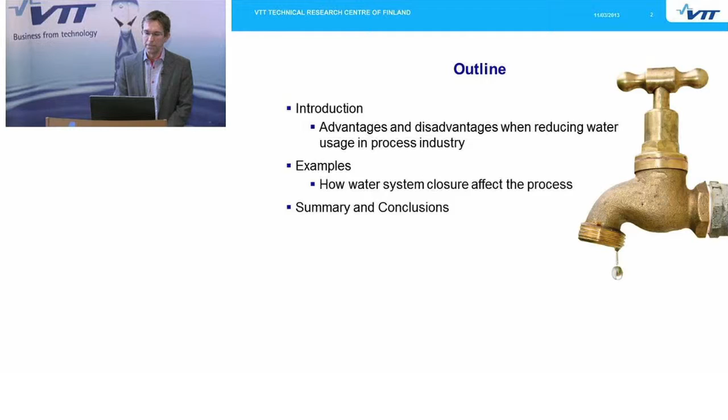Thank you, Tuomas. Ladies and gentlemen, I will take a slightly more practical viewpoint to today's topic, and I will start by briefly describing the challenges and benefits that could come out when you are using water footprint, for instance, in reducing water consumption in industry. And then I will show some examples from VTT studies how these issues can be managed and what kind of consequences there might be. And in the end, I will repeat myself and tell this all over again in the summary.

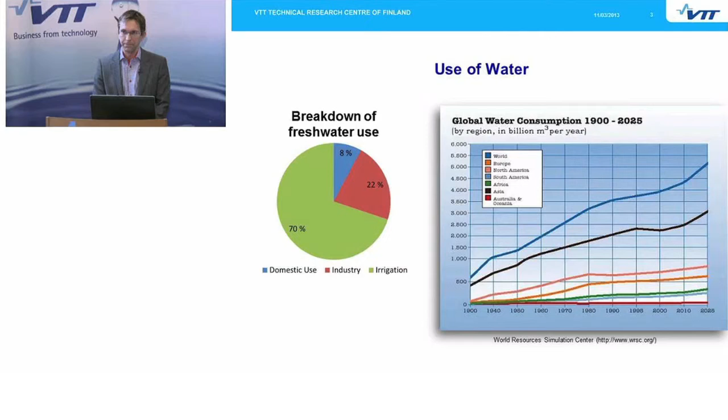Minister Niinistö already covered the statistics quite nicely. As he said, the industrial usage of fresh water is slightly more than 20% of the total fresh water consumption in the world. But of course, if you add up all the reused water as well, this share increases significantly. And the challenge here is, of course, that the water consumption is expected to increase.

And where is the water then used? Helena later today will come back to this issue. I will just shortly list the main usages of water in process industry. Material is easier to transport in liquid form, and therefore water is used basically to dilute the material for transportation, for pumping. And of course, for shower waters, shower in process industry means probably a bit different thing than in households, but it's like wetting, trimming, for instance, in paper making, trimming the web, cleaning and anti-foam purposes.

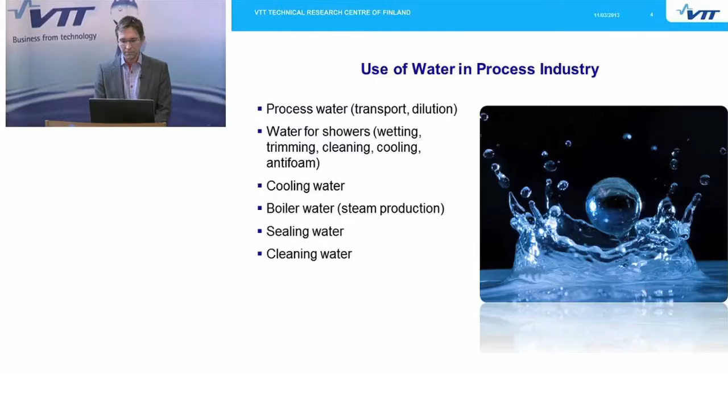Then cooling water, there are cooling systems in almost every industrial process. And the other side of the story is the steam production, heating and drying. Water is used there as well. And then sealing water for pumps and of course for cleaning.

Good thing in reducing water usage is that there are several advantages as well. Without these benefits, there would be no sense to do that. I have here divided these benefits into three categories. First one is economical advantages. This basically means that you are using less water. Water has some price, and therefore it's economically attractive to reduce water consumption. This is also related to the treatment of the fresh water. It costs as well.

Then from the process point of view, in principle, water recycling enables more stable operating conditions. This is mainly related to temperature, which I will come back to later. Then, of course, when you recycle water, you are also able to recover all the materials that have gone with the water. So therefore, from process point of view, you also can achieve lower material losses. And in some processes, drainage improvement as well, meaning productivity, which is again related to temperature mainly.

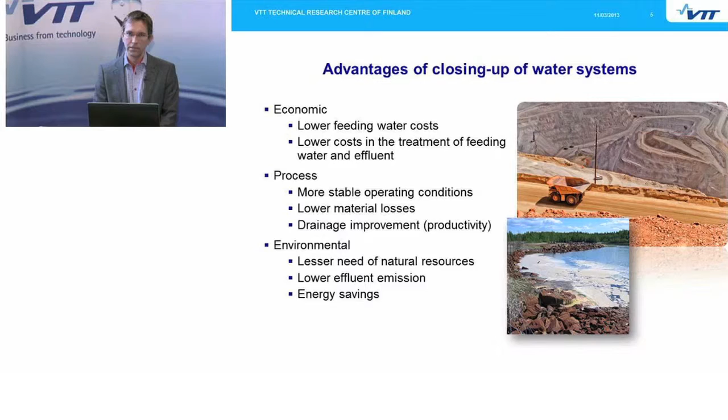And from environmental point of view, you need less natural resources, meaning water, and at the same time, you will have less effluents back to the environment. And of course, the energy savings, you don't have to heat up water and pump it so much.

On the other side of the story are the challenges. There are not only benefits. As I said, materials tend to accumulate in the water cycles once you start closing them. There are suspended solids, and there are also dissolved and colloidal substances. These affect the productivity, and moreover they affect the performance of different functions in the process, meaning, for instance, chemicals function differently when these so-called detrimental substances are accumulating.

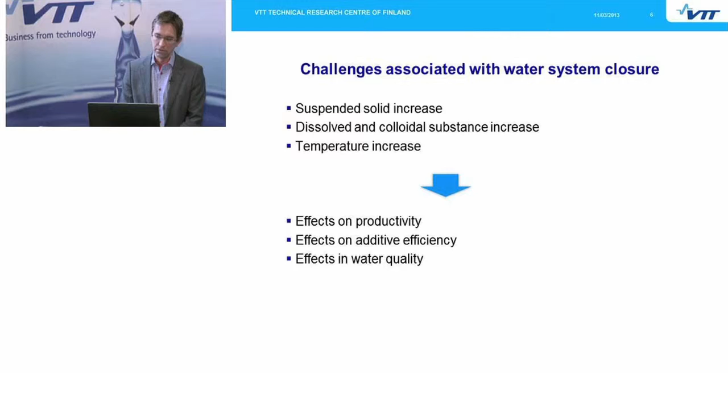And temperature increase is a challenge as well, since, for instance, microbiology may become an issue when the temperature settles at a convenient point for microbes to multiply. Then to the examples. I will look at these examples from physical, chemical, and microbial point of view, and show that this whole area is really complex. And I will start with the physical one.

So if you have a water system which is not closed at all, of course your freshwater quality varies, and you will have certain problems coming from the fresh water. But if the system is not closed, the problem comes and it goes away with the water. But when you start closing it, the same problem comes over and over again. And then we are talking about a certain type of oscillation. In principle, it fades away when new water comes in, and it kind of dilutes the problem.

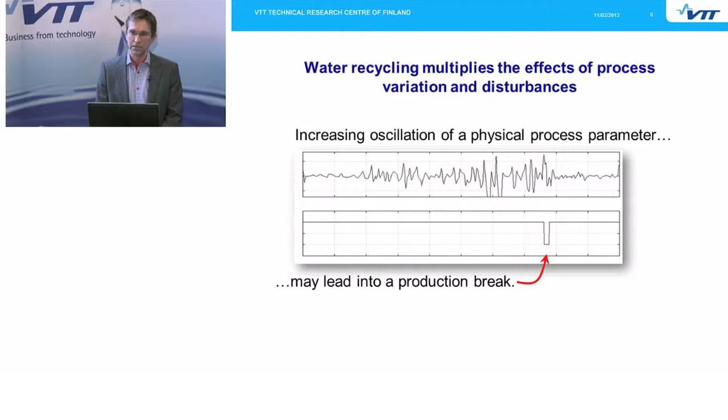But since the system must be controlled, there are certain control loops which try to compensate this problem by chemistry, by physics, by various types of activities. These oscillations tend to increase, and this is a typical physical increasing oscillation curve shown in the figure. And at some point, the process cannot handle it anymore, and it leads to a problem, in this case, a production break.

Next example is the chemistry part of the issue. This is an example from a paper making process, and there, in the beginning of this monitoring period, the system was closed, not totally, but the closure was increased, and it led to the accumulation of dissolved calcium into the process, as shown in the figure in the middle. This, of course, increased the conductivity.

The salt content of the process increased, which then started to affect the chemical balance of the system itself, which is shown in the lowest graph here. The charge started to decrease. This means that the anionic compounds and these salts started to accumulate in the process, and this is called anionic trash in the process. Then the chemicals added do not work the way they were designed to.

This anionic load increases the use of chemicals, and you really have to redesign the system from scratch, basically. This just emphasizes the complexity of the issue.

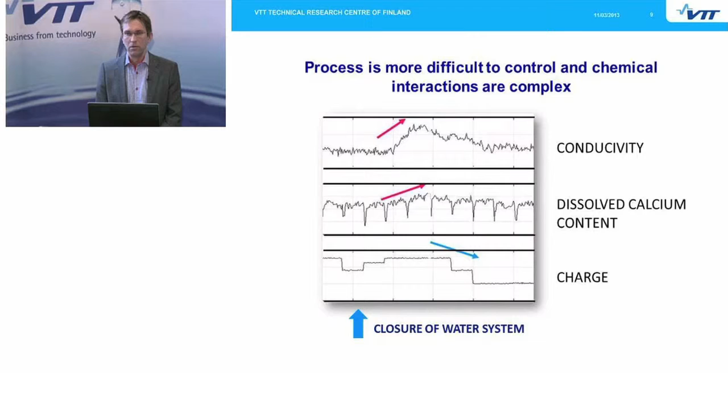Then to the temperature part. This shows that, of course, usually when you take water into the system, the temperature of the water is lower compared to the temperature of the process. And when you circulate the water, the temperature keeps increasing all the time. And for some reason, it usually settles around 40 degrees centigrade, which is more or less the perfect condition for microorganisms to build up. And when that happens, they consume the oxygen away, and in the next slide I will show what it means in practice.

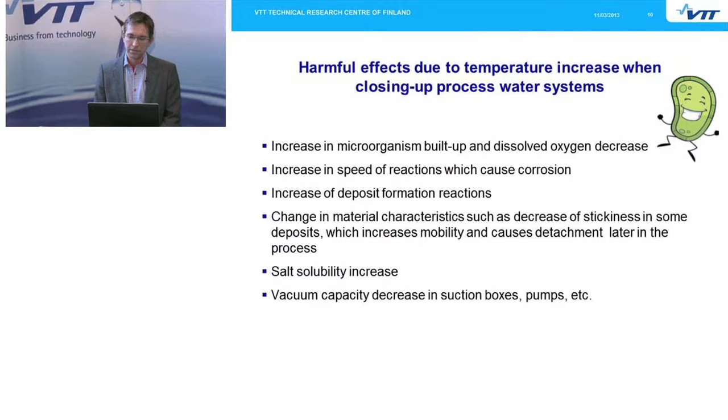Also, the speed of reactions, such as corrosion, increases. Deposit formation increases. Also, some material characteristics change, which might mean, for instance, that the stickies get loose and then they are found somewhere else in the process, causing problems. Salt solubility increases, which means conductivity increases, for instance. Also, salts are related to corrosion. And then the physical part of the problem is that the vacuum capacity decreases, affecting the suction boxes, pumping efficiency, etc.

This is an example of how microorganisms build up in the process. In all the water-intensive processes, at some point you have to store the water. It might be that you just don't want to throw the water away, or there's some break in the production and you cannot use the water. And when it's recycled water, it does contain this organic material I already told you about, meaning dissolved colloidal material, organic compounds added to the process, or organic compounds coming from the particles that are used for the product, for instance, fibers in paper making.

And when that type of material is stored, the microorganisms start to build up immediately. And this example shows that after just a few hours of storage, basically all the oxygen is consumed from the process. Then the redox potential starts to decrease, and these reductive reactions start to decrease the pH due to acid formation. And these acids are usually smelly compounds. There is smell in the process and also outside the process, and also the product starts to spoil, and of course all the conditions change, which means that the process cannot be driven as it's designed to.

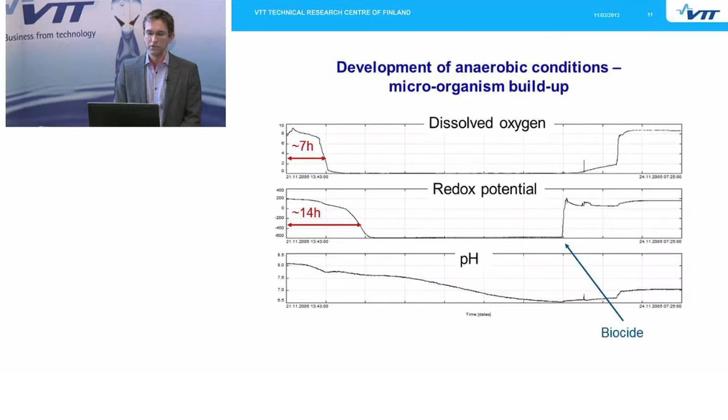And as also shown here, this all can be fixed by using biocide, but biocide has a price. Of course, price as money, but also the price that it affects the process. It is usually a salt itself, and it causes other problems.

Then to the summary. So most of the problems or challenges related to this closure are related to controlling the system and how the system varies. If there are a lot of variations, the process is difficult to control, because if you, for instance, make some change, it disappears into the fluctuations and you don't know what the effect is. So the key is to minimize these types of variations and optimize the process.

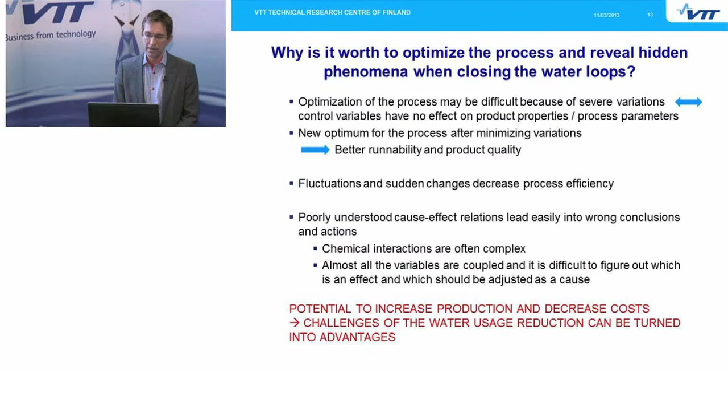Also related to the chemical interactions, you have to optimize the process with the chemicals, because usually after closure you cannot use the same chemicals you used before. And also there the interactions are really complex. It's really difficult to figure out which is cause and which is effect, which should be adjusted and which should just be monitored. But if this task is carried out properly, there's a potential to turn these challenges into advantages.

And then in this last slide, I will finally mention the word water footprint. So as Elina just told you about the footprint, it's really a good tool to show the potential to decrease water consumption or improve the quality of the effluent or anything related to water usage in the processes. So with that tool, you can show what the potential is. But after that, it's really work.

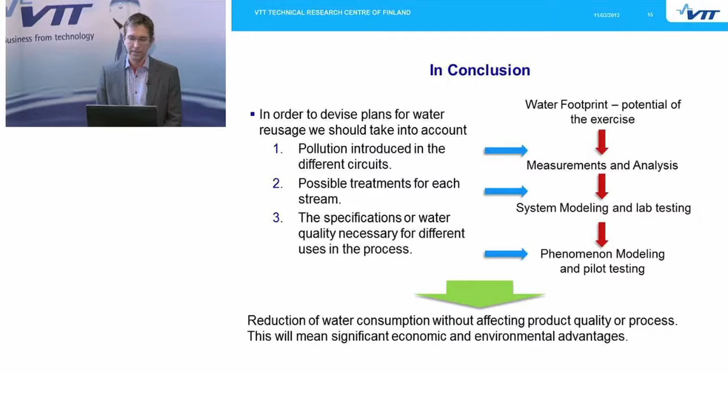And then finally specifying the necessary water quality for different uses and designing what water you can use and where. And this is then probably phenomena modeling and carrying out the activities in pilot before applying it at full scale. So reduction of water consumption is possible without affecting the product quality or process. And by properly designing these activities, there are really significant benefits, economic and environmental.